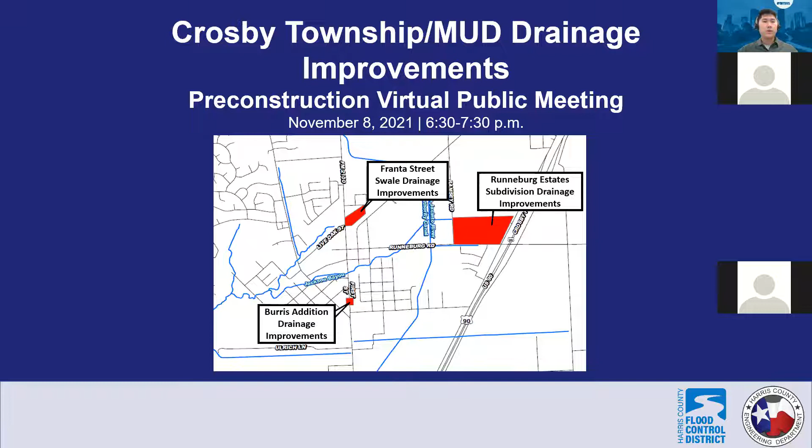Tonight's virtual public meeting outlines the Crosby Township and MUD Drainage Improvements Project. My name is Justin Tran with Freese and Nichols, supporting the Harris County Engineering Department. I will be your moderator for this evening. The Drainage Improvements Project is brought to you by the Harris County Flood Control District and the Harris County Engineering Department.

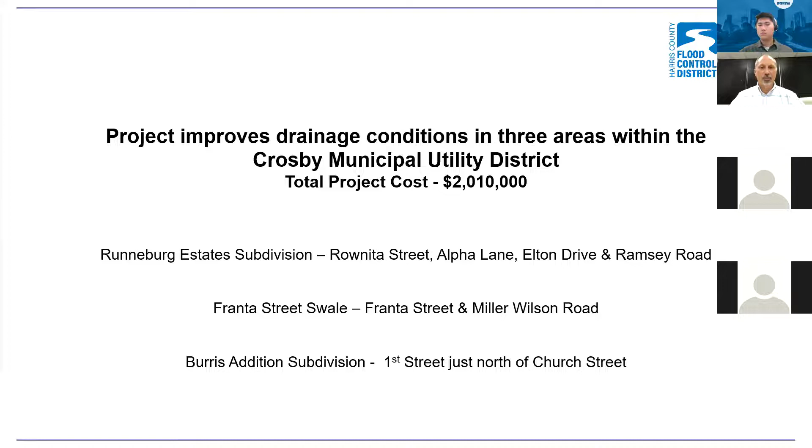In the first area, the Runneburg Estates subdivision, 21 homes have reported a history of flooding. It's caused by undersized roadside ditches and undersized drainage pipes.

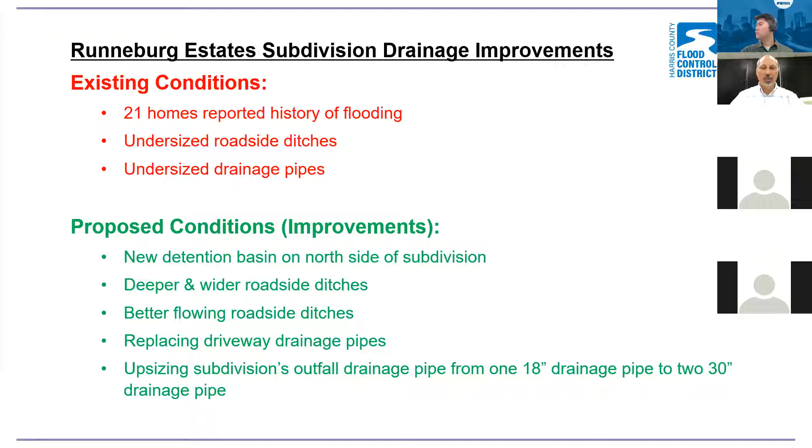The proposed improvements for this subdivision include a new detention basin on the north side of the subdivision, deeper and wider roadside ditches for better flow, and replacement of driveway drainage pipes. We'll also be upsizing the subdivision's outfall drainage pipe from an 18-inch pipe to two 30-inch pipes.

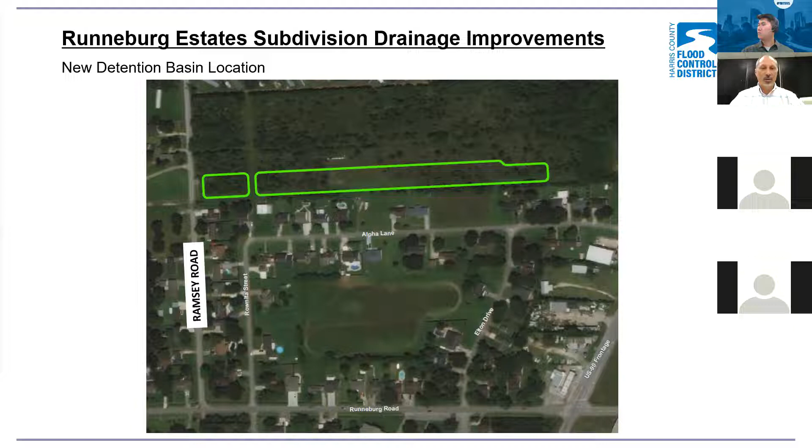This picture shows the area where the proposed detention pond is going to lie, just north of Alpha Lane, paralleling Alpha Lane, just behind the homes there. This is an artistic rendering of the detention basin as you are standing on Ramsey Road looking east.

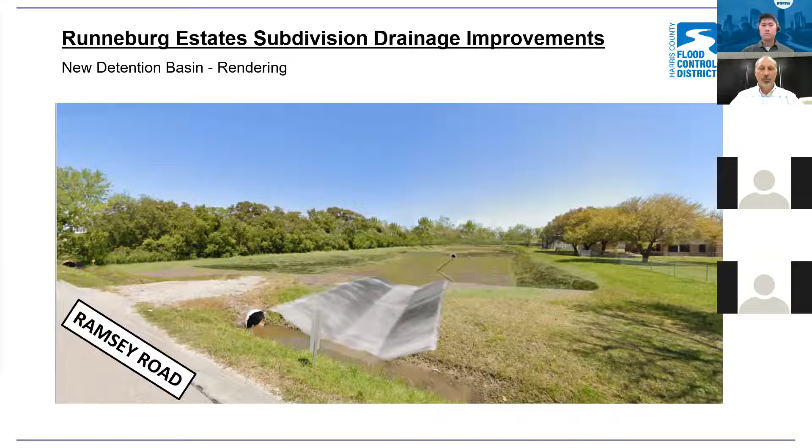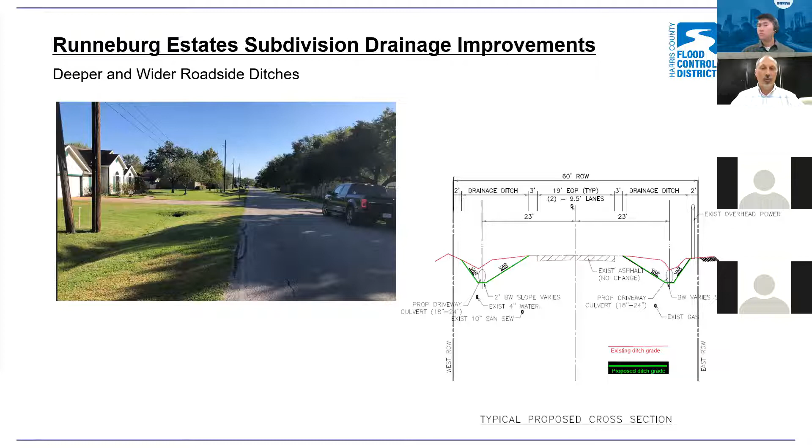The roadside ditches within the subdivision along Rownita Street, Alpha Lane, and Elton Drive are going to be wider and deeper. This picture is along Rownita Street. In the diagram on the right, the red line shows the existing top of the ditch, and the green line represents the ditch after construction is complete. You'll notice they'll be deeper, and we're widening toward the roadside of the ditch.

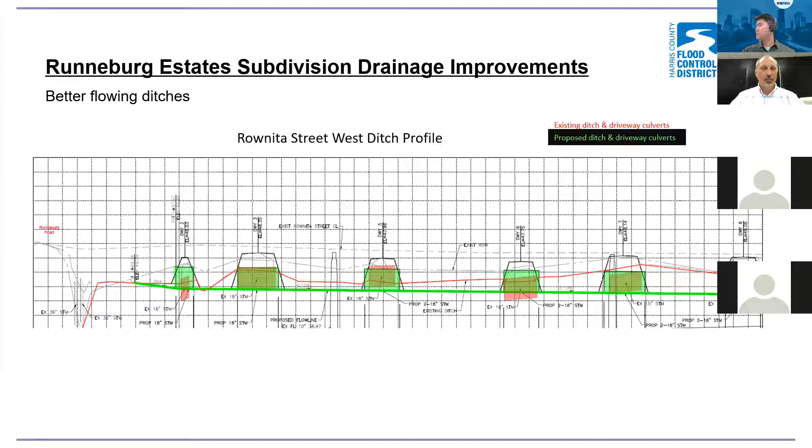Within the subdivision, all the driveway culverts will be replaced along Alpha Lane from Elton Drive to Rownita Street. We'll be replacing Rownita Street and Elton Drive culverts. These culverts will be lower, and in some places bigger, in some places the same size.

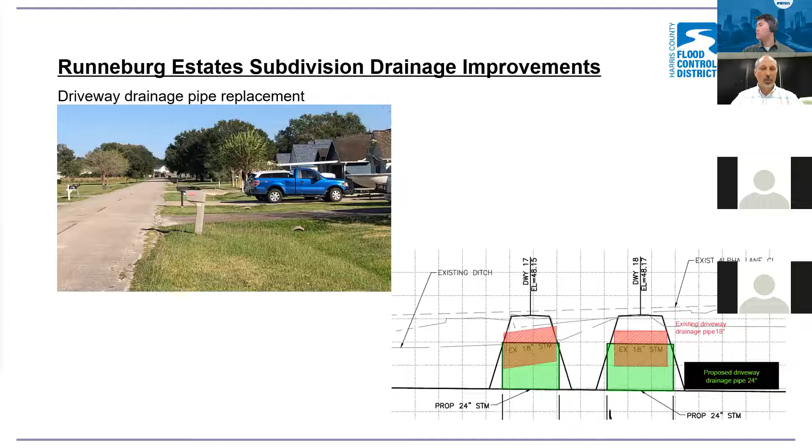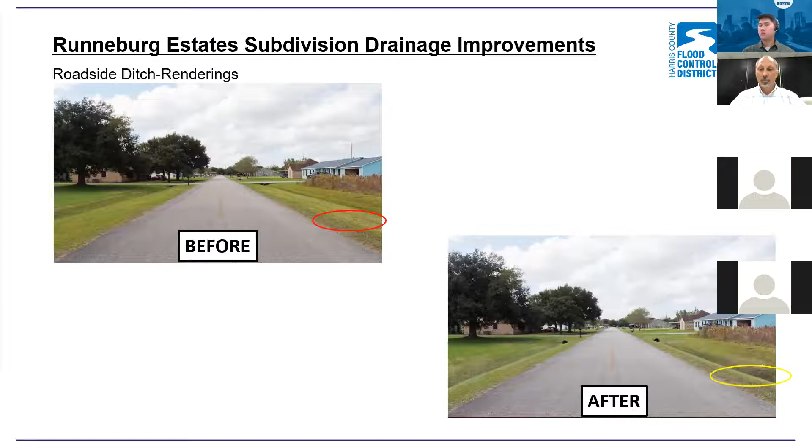The first benefit that I talked about here, after we add this detention pond, we're going to add two new outfall pipes. They're both 30-inch. They're going to drain from Alpha Lane to the new detention pond. They're going to replace that existing 18-inch, which is on the corner of Rownita Street and Alpha Lane there.

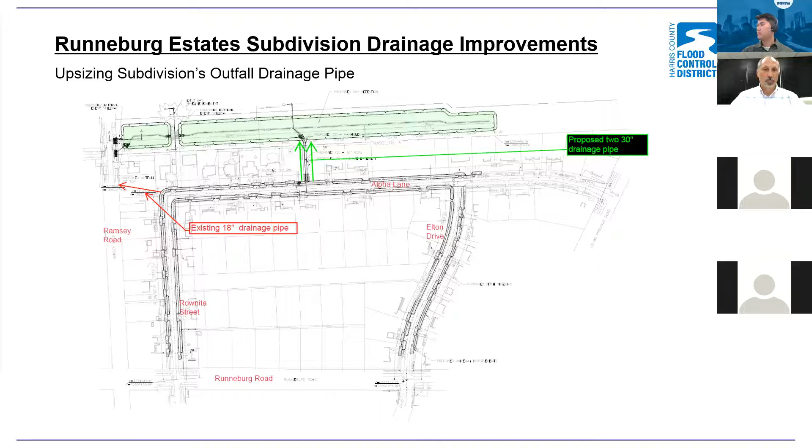The phases for construction are as follows. The first phase will be excavating the detention basin. The second phase, the utility relocations will start.

Centerpoint has to relocate some gas lines. The Crosby MUD might have to relocate some water lines. Houston Pipeline has to relocate a gas line. All these relocations are along Rownita Street, Alpha Lane, and Elton Drive.

The third phase, after detention ponds and utilities phases are complete, we'll start excavating the roadside ditches. We'll install the drainage pipes underneath the driveways, and then we'll install the outfall pipe that connects the subdivision to the detention basin.

The fourth and final phase will replace all the driveways and repair them that are over top of the existing drainage pipes that we replaced.

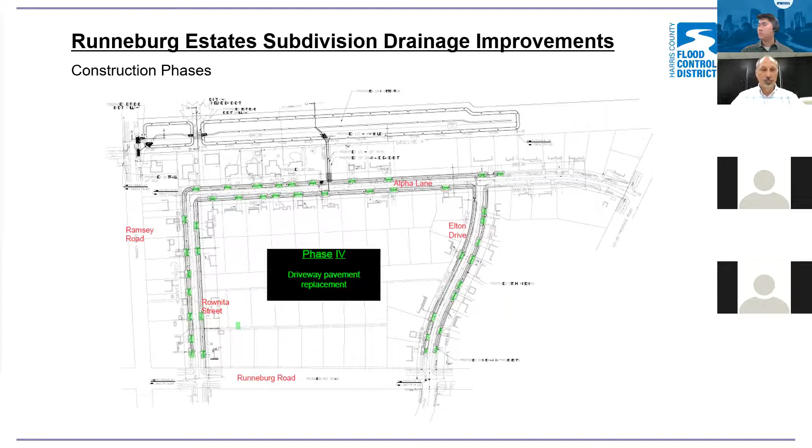What can you expect during construction? During detention basin excavation, dump trucks will be entering and leaving the site along Ramsey Road. During the utility adjustments, temporary service outages will all be coordinated by the utility relocating their service line.

During the ditch excavation, equipment will be loading dump trucks, which will be hauling dirt out of the subdivision. During the drainage pipe removal and replacement, your driveway will be out of service for a few hours while the drainage pipe is replaced.

Also, during the driveway work, we'll be replacing the pavement of your driveway. And during that time, the contractor will coordinate with the property owner to give you access to your property.

The construction duration for each of these phases are as follows. Detention basin will take 3 months. Utilities will take 2 months. And the ditches, drainage pipes, and driveways will take 4 months.

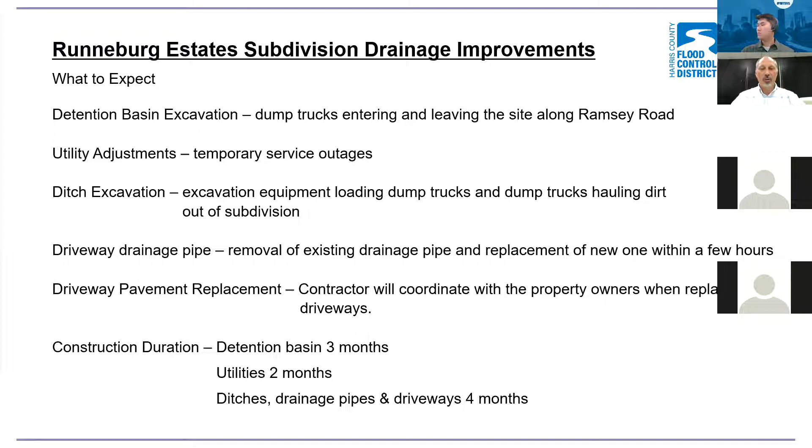The second area of this project is the Franta Street swale. In this area, 6 homes are reported flooding during Hurricane Harvey. This is due to excessive vegetation in the receiving stream. The proposed improvements will be to remove vegetation from the stream and along the banks of the stream, and to remove sediment from the stream.

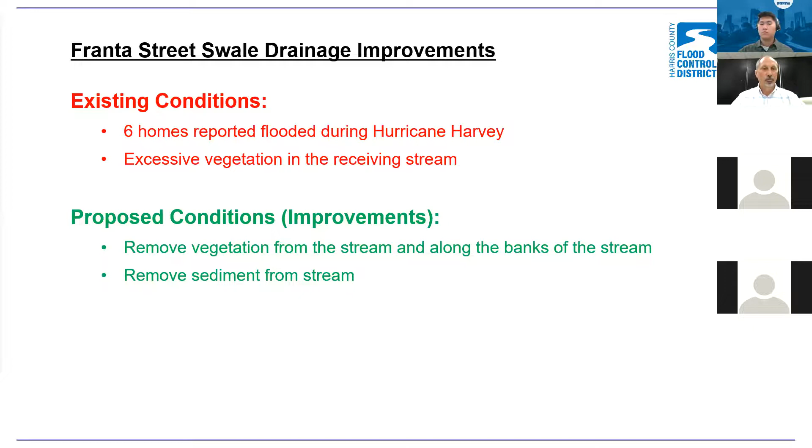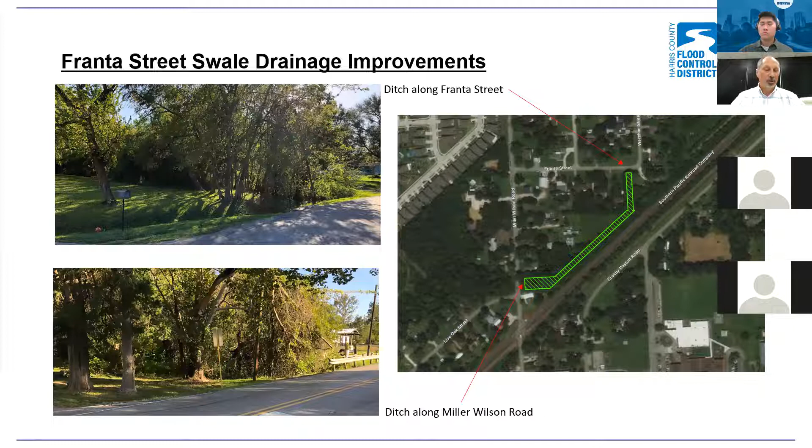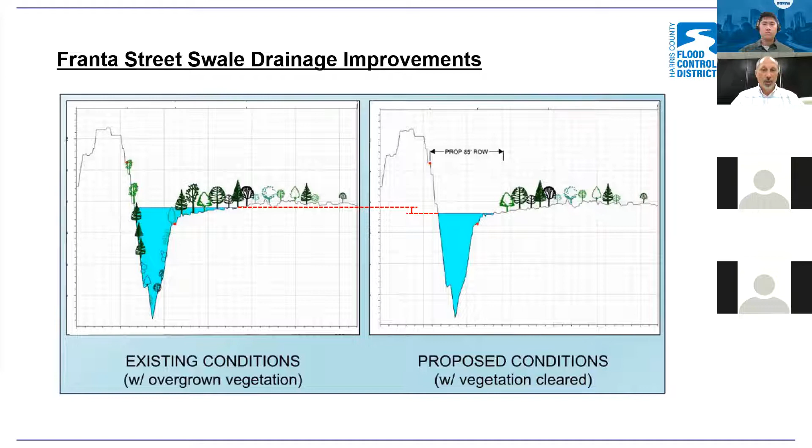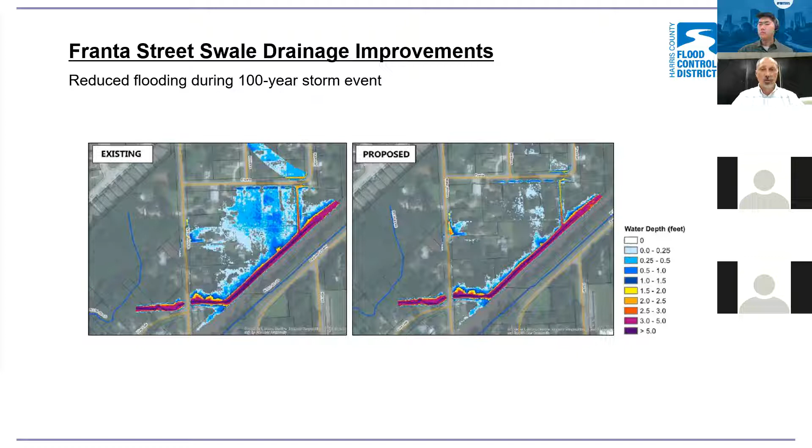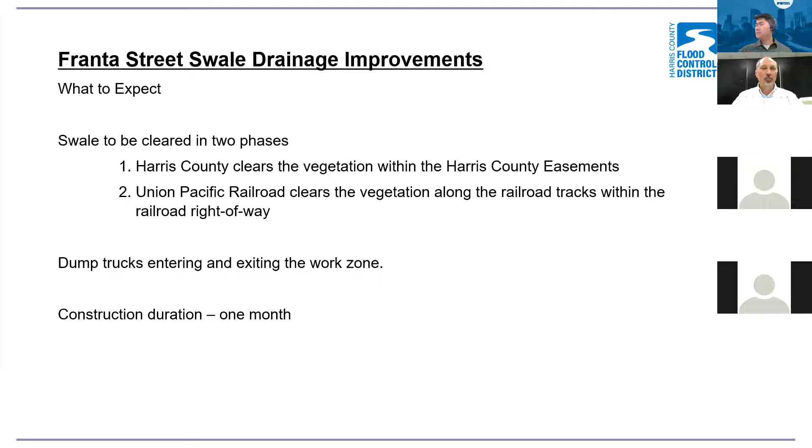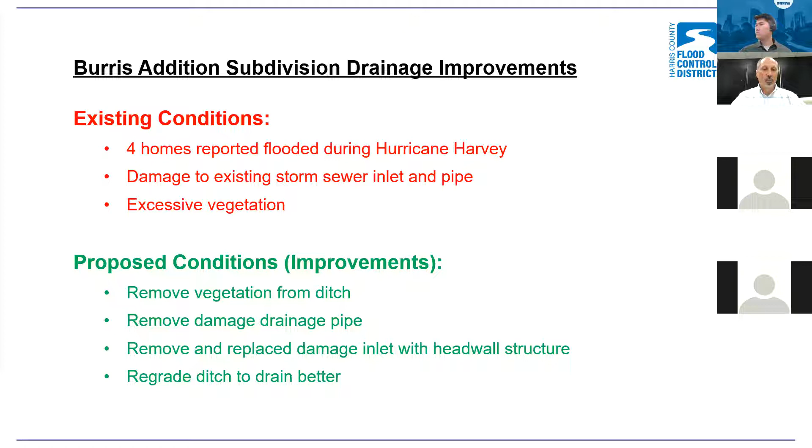The third area, the Burris Addition subdivision, 4 homes have reported flooding during Hurricane Harvey in this area. This is due to damage to an existing storm drain, sewer, inlet, and pipe, and excessive vegetation. The proposed improvements would be: 1, to remove the vegetation from the ditch; 2, to remove the damaged drainage pipe; 3, to remove and replace the damaged inlet with a head wall; and 4th, to regrade the ditch to drain better.

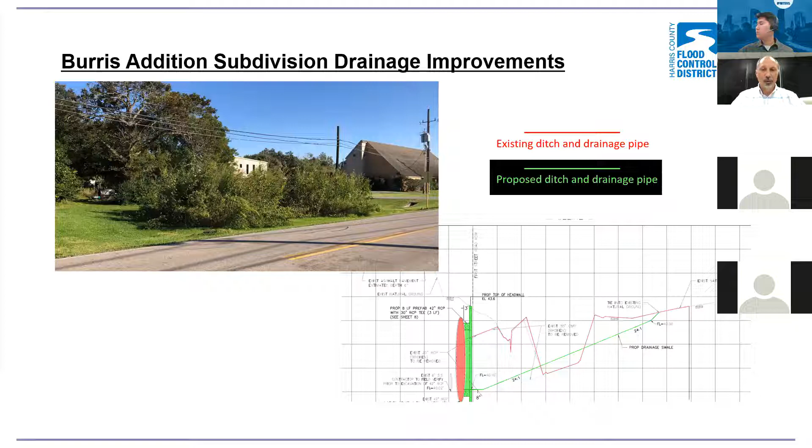The red lines of that diagram show you the existing storm drain culvert ditch that is torn up and not draining properly. When we're done, the green line represents the swale. It'll be a nice, smooth flowing swale, allowing the water to get into the 42-inch pipe there more efficiently.

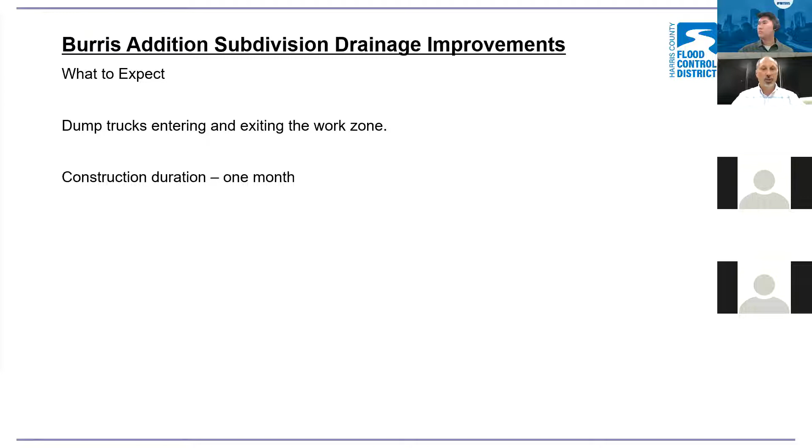What can you expect during construction? Again, dump trucks will be entering and exiting the work zone, and the construction duration is 1 month.

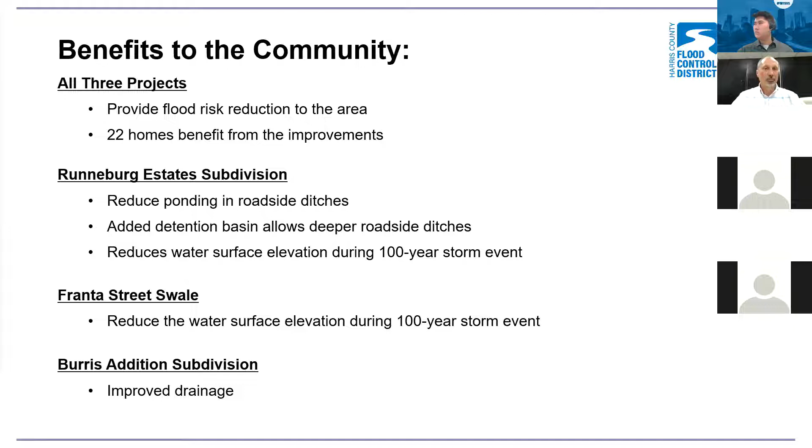The construction management team is as follows: myself, I'm the project construction manager. I represent TGI Engineering Consulting. My on-site person will be Hussam Mande, who's the resident inspector. He also represents TGI Engineering Consulting, and the contractor will be determined.

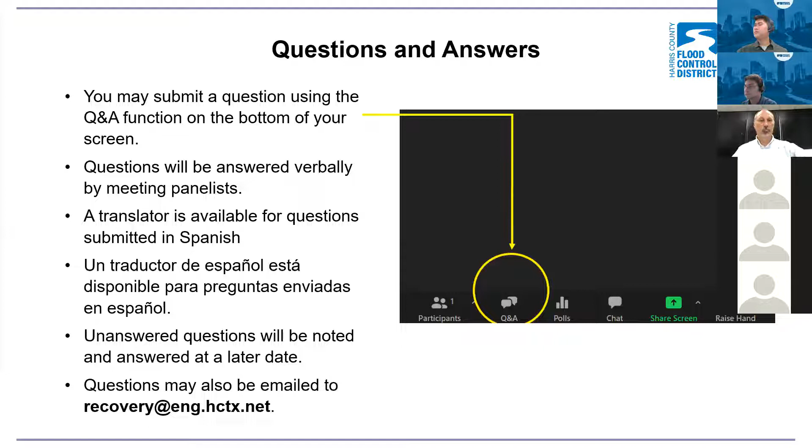We've got a question from Sam Baldwin: Did I understand correctly that our driveways will only be blocked for a matter of hours while the culverts are being replaced? Yes, typically while the culvert's replaced it's just a 2 or 3 hour process. The contractor will be coordinating with you during that time. If there's a reason it would take longer than a couple hours, we'll make sure a temporary driveway is placed in like kind during construction so that you have access to your property while the culvert and driveway are being replaced.

Earlier we had a question that was answered before the Q&A session, so I'll repeat it so everybody can hear it out loud. This came from Roberta Bernard: I would like to know if the needed drainage work will be done despite the one neighbor who is the obstacle who doesn't want the drainage done. Roberta, the proposed drainage improvements in our presentation are slated to be completed and no obstacles currently exist to completing this work.